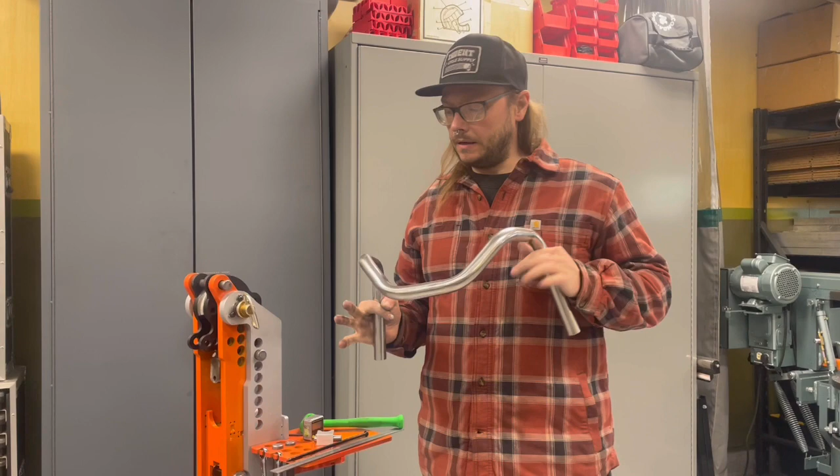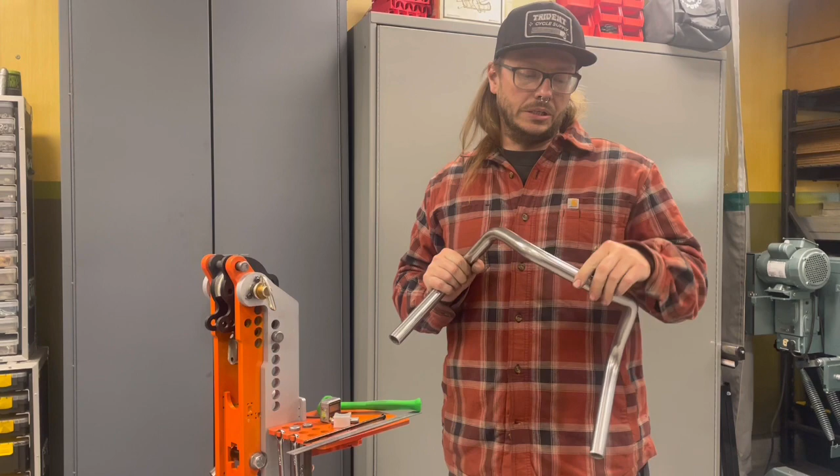All right, now I'm just gonna go over some of the features of the 1.9 CLR die, which is different than some of the other dies on the market, obviously because it's the smallest radius that I'm aware of. I'm just gonna change some things around and then we'll jump right back. This is a set of 6-bend handlebars that I bent up on this bender this morning. I used the CAD program that's included with the bender to figure out the dimensions, all the rotations, the bends, the feeds, and bent these up, and they came out pretty good.

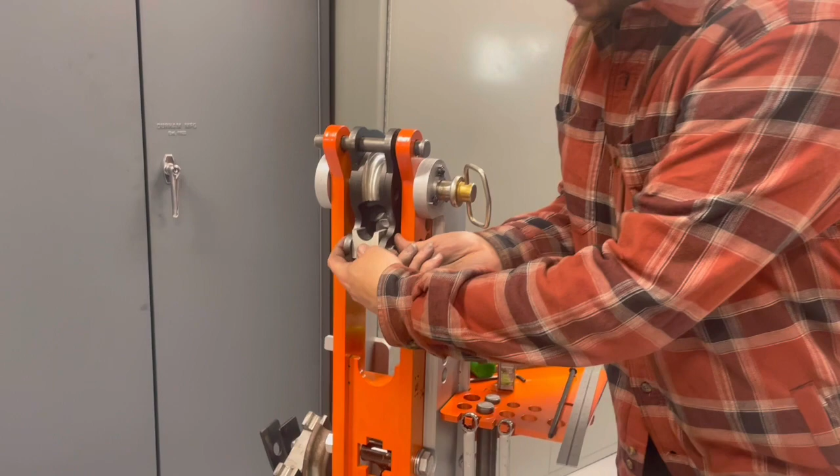I just wanted to talk to you about some of the features of this super tight radius die. One, we've got our drive pin located up out of the way. That allows for more clearance down in here when you're doing the bends. The shackle that holds the bends goes in on here. You can install the pin here. You can install the pin in here if you want to hold it really closely.

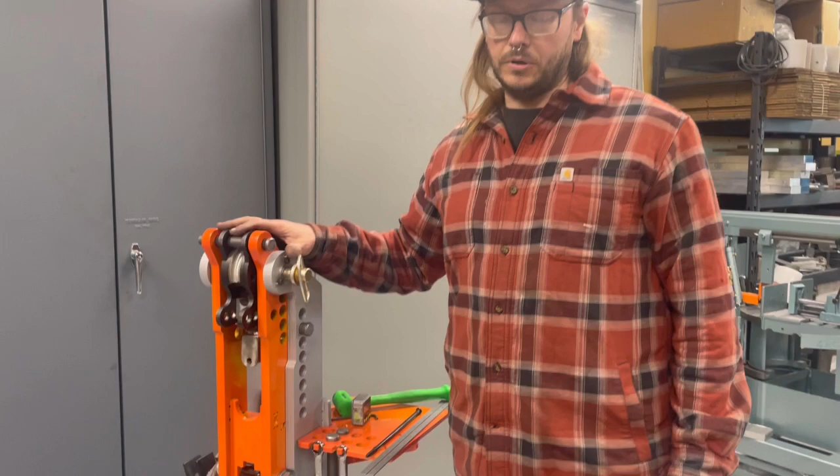And that just gives you the really tight bend-to-bend numbers that you can't get with other benders. One thing to note though with this very small radius die is you will get a little bit of necking on the inside of your bends. It's not terrible. Usually you can blend it out just by cleaning it up here and here a little bit, and you won't even notice it with the naked eye.

But numerically, we're losing around 7% on this 120 wall, 1-inch stainless steel. It is welded tube, not seamless, so that usually crushes a little bit worse. But so worst case scenario, I've lost about a 1/16 of an inch on the cross section here. But you know, it really isn't that noticeable, and like I said, you can pretty much blend it out and not notice it at all.

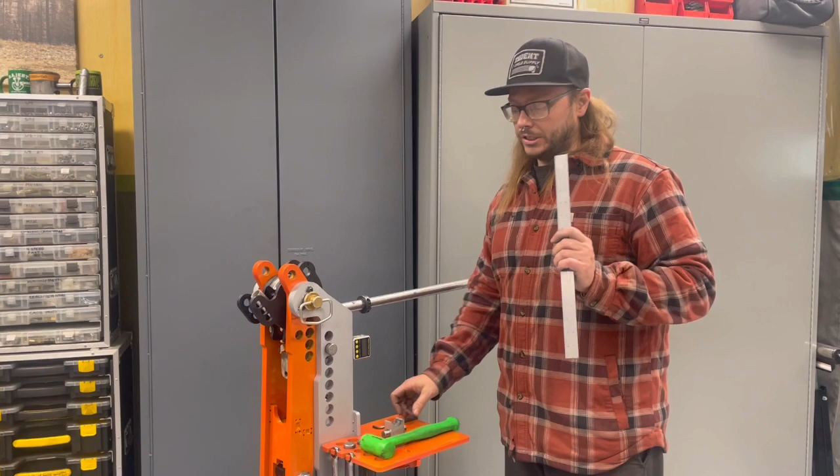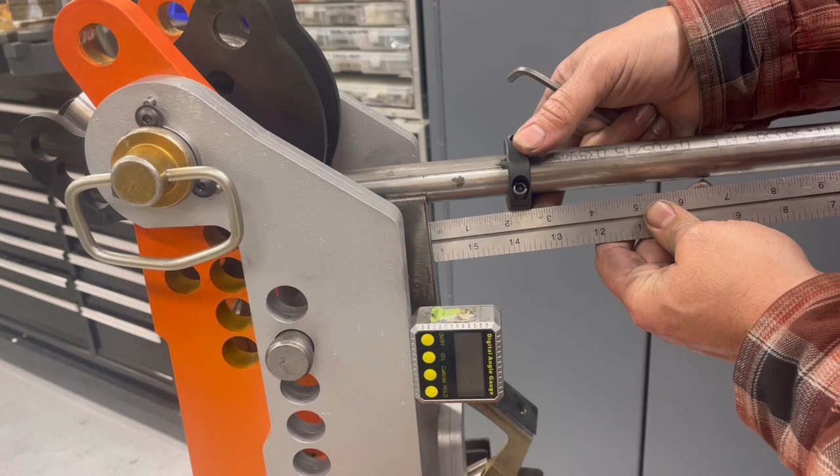Okay, I'm going to show you how the vertical bender actually works and what is really great about it. So I've already gone ahead and put an approximately 45-degree angle bend in my tube, but I haven't done anything else. So the first thing that I'm going to do is set my feed. In order to set my feed, I've got a 1-inch shaft collar, which is included, and I'm going to slide that up. The feed distance is going to be the distance between the bends. So I'm going to go for about 2 inches here, and I'm just going to tighten that down.

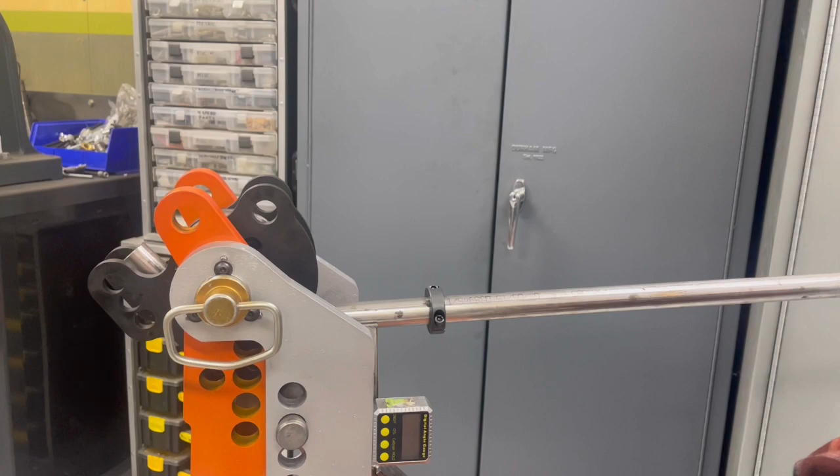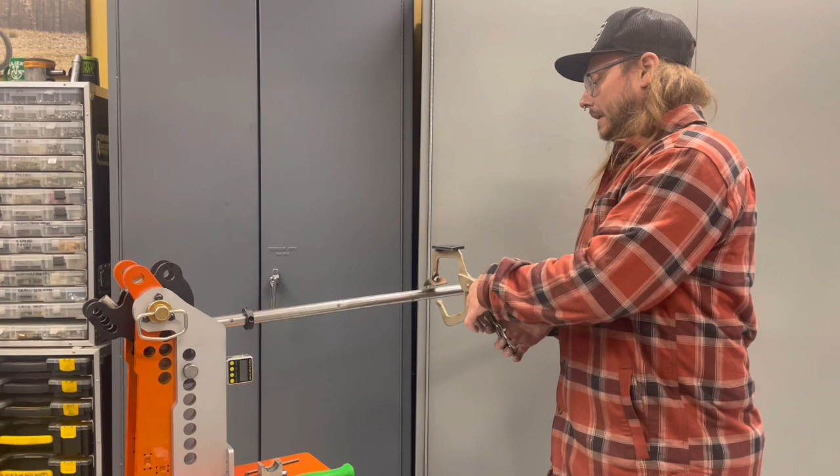All right, next, I'm going to take my handy dandy clamp. This is just a vise grip with an angle and a flat plate welded to it. And I'm going to clamp this on the tube. The orientation doesn't really matter. And I'm going to take my digital angle finder and set that on there, turn it on and zero it out. Okay, now I'm going to pull up on this to release it and push it forward. And for the time being, I'm just going to let this hang.

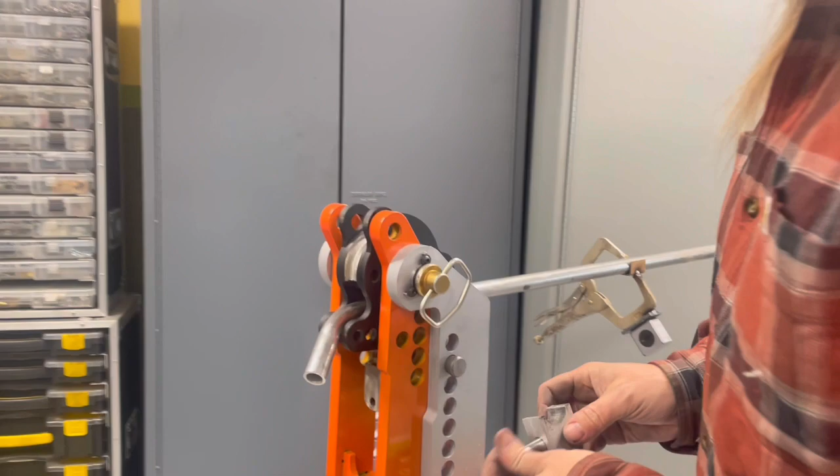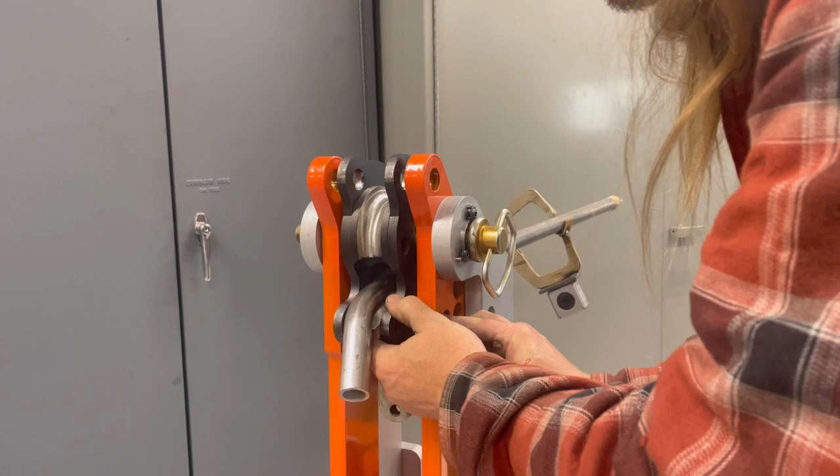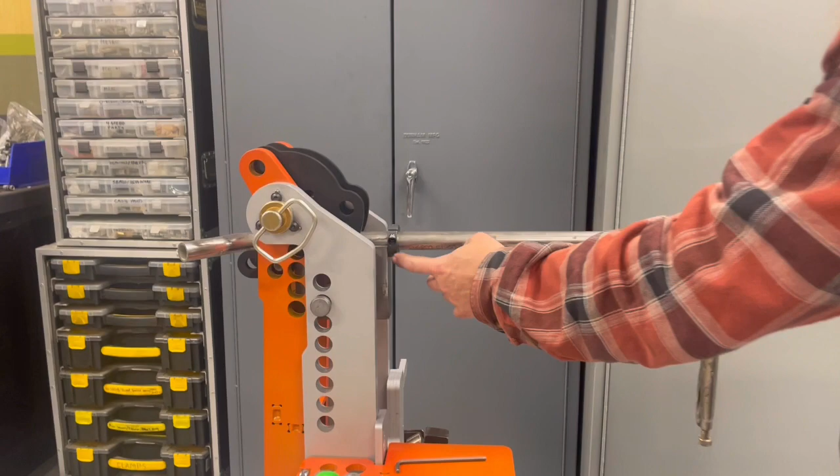And so now I'm going to reset my die. In order to reset the die, we just got to line a few things up. You put your backing plate underneath here and slide this pin through like so. Okay, now I'm going to look at my angle finder and set this to a 90-degree angle. That'll allow us to know that our bends are 90 degrees apart. It could be 180, it could be whatever you want. And note that I've slid it forward till the shaft collar bottoms out on this die block, which means that I've fed 2 inches into the machine.

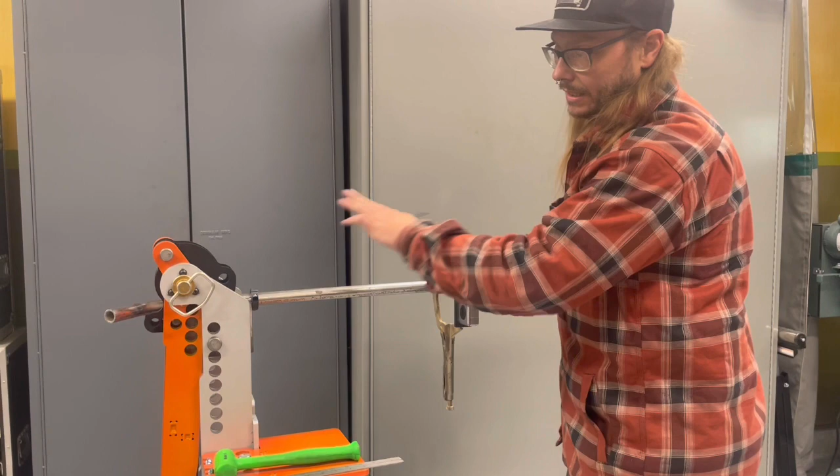So the last thing I need to do is put this pin through here, and we'll just line it up by adjusting that a little bit. And the last thing we have to do is loosen this shaft collar. Now, this whole time I've been keeping downward pressure on the back of this stock right here, and that just kind of locks everything in. So once the shaft collar is loose, I can slide that back out of the way, and then I'm going to start my bend here.

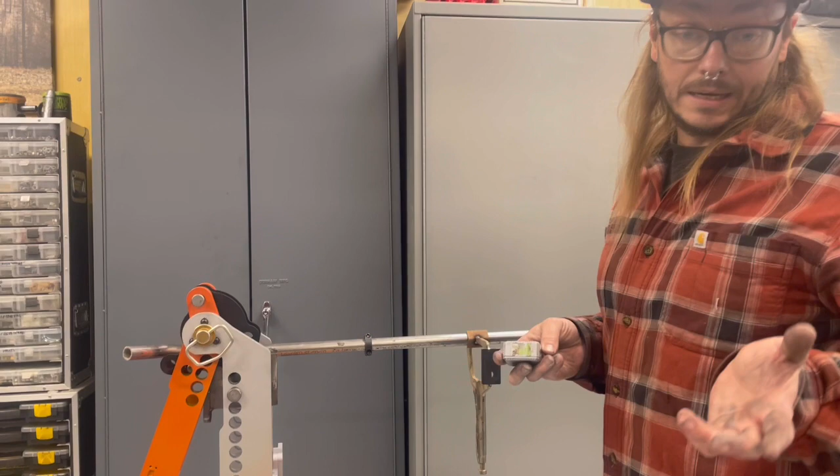And so once I've got some of the bend engaged, I'm going to take my angle finder off of here, or if you have a second one, it's really great, and I'm going to put it on here. I'm going to calibrate it, and that'll zero it out. And then I can indicate off of the bottom of this tube right here. It's going to be hard to see on camera, but I can see it. And now I'm going to be able to read my angle that I'm bending.

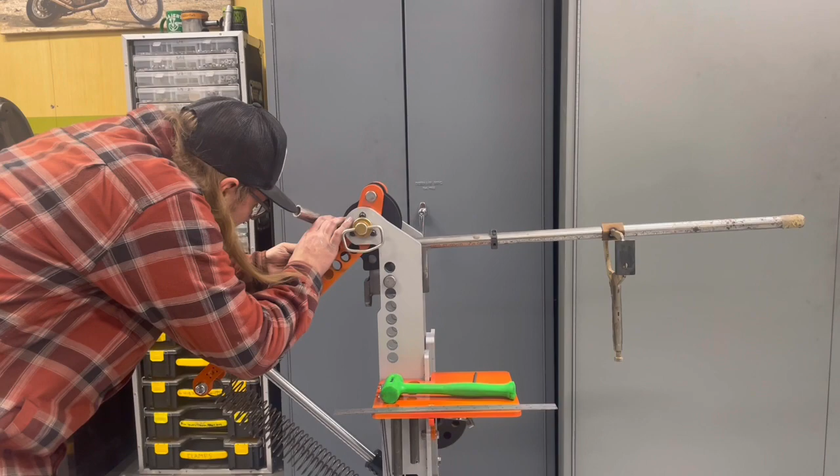So let's say that we're going for a 30-degree angle.

Sorry about the air compressor kicking on, but there's nothing we can do about it.

We're going to go for a 30-degree angle here. Just from my experience, I know that 30 degrees will get around 2 degrees of spring back. And so I bent it to about 32 degrees here. And so what I'm going to do is release. Once this pin is loose, I know that there's no tension on this system. So I can come over here and just to check, I'm going to zero my calibration out, put this back on here, and we are almost perfectly at 30 degrees.

So now we've made one bend in relation to another bend. We know the difference in the angle clock between them, and you would just go on and continue to bend and bend and bend however you want to bend it. And you can do that based on the CAD programs that I provide or your own design.

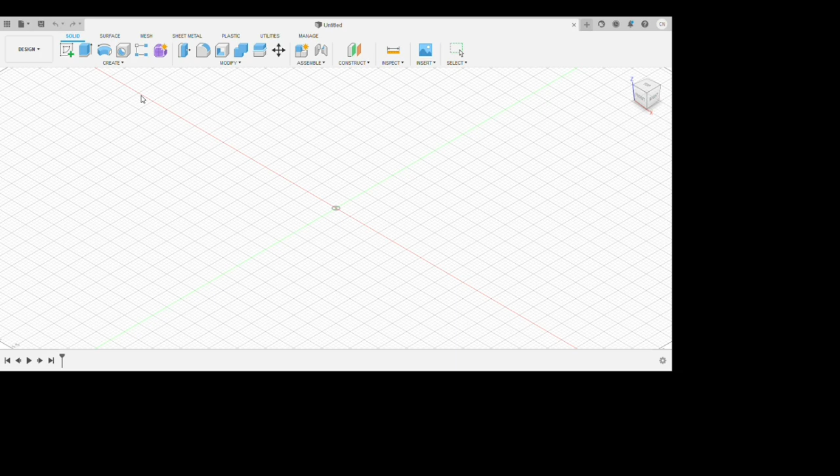So the first thing you're going to do is open one of the handlebar files. You'll click open from my computer and then browse to the file on the flash drive. You'll probably want to make a copy of this just in case you screw something up. You'll still have the original. So I'm going to click on the 4 bend bars and open those up, and it just defaults to a pretty standard shape here.

And what we're going to do is, in order to make what you want to make, we're going to come in here and click modify, come down to change parameters, and that's going to open up this dialog box. And we're going to come down here into the user parameters, and we can start editing things. So let's say that you want to use 7/8 material. And the center length is the length of this section where your risers would clamp. So we'll just choose 5 inches for the time being.

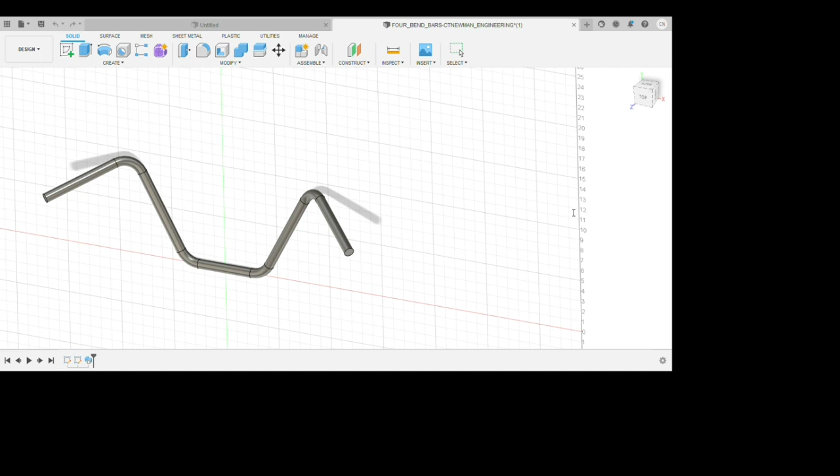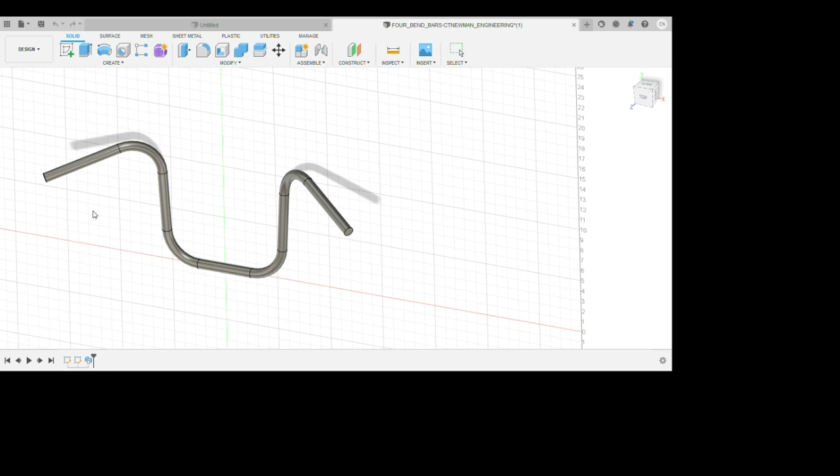The centerline radius, let's say you've got a 3-inch centerline radius die. And bar height, let's make them 12 inches tall. And we'll make the bar width 33. The grip length is the length of the section where your grips and brake levers would go. So we can make that 7, 7.5, 8 is usually pretty good. We'll do 7.5 in the interest of changing something.

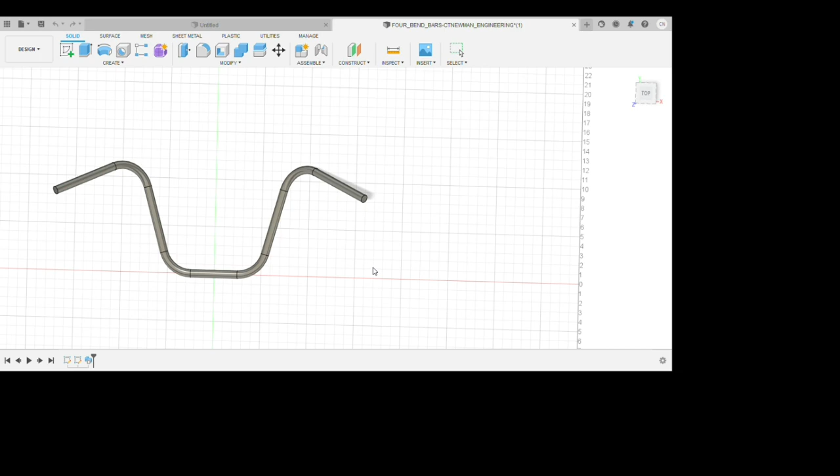The grip drop is basically, when viewed from this angle, how much the end drops here, and so 2 inches is good. That looks good, but let's just go with 2.5 again for the sake of changing something. And then the pullback is basically how far from this point to the center line, which is 6 inches. Let's make it 4. Okay, the last user parameter here is not meant to be edited, and what that's doing is it's outputting the total length of material you'll need. So for these bars, you'd need 51.5 inches or so.

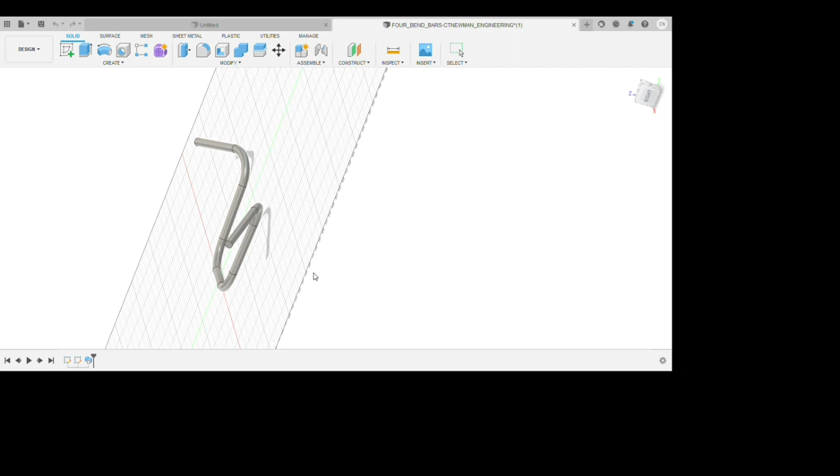It's always a good idea to bend your bars from the longest stick possible, because if you, for instance, mess up your second bend, you can cut it off right there and you don't waste an entire cut to length piece of material. But it's good to know at least how much you'll require. So once you've got your design here, what the computer program does is it basically spits out all of the values that you need in order to use the bender.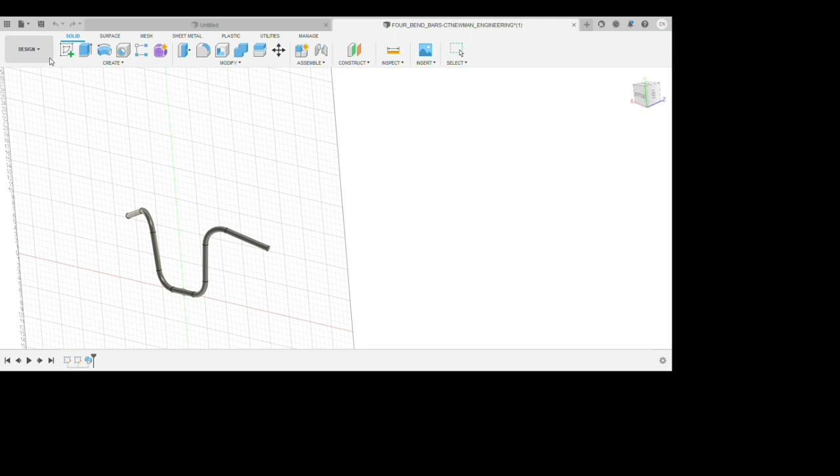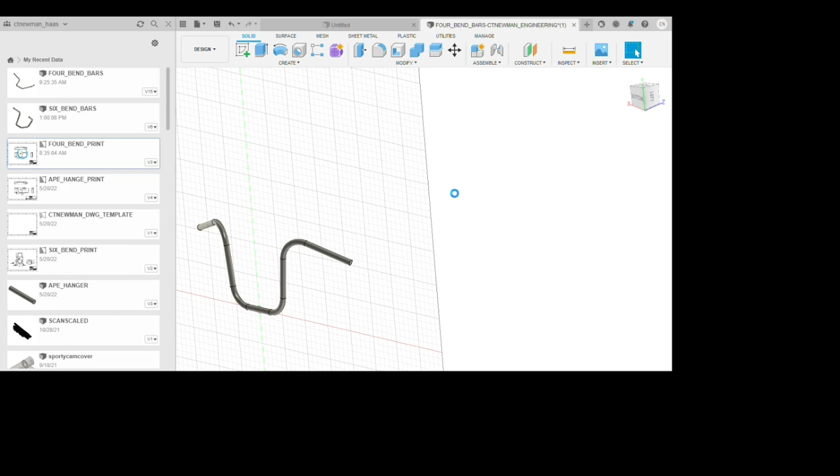Hopefully that's not too complicated. It's actually pretty straightforward. You can also, let me see here. There will also be a print that comes. I was hoping to be able to have it update a scale print, but unfortunately that doesn't work. So it'll just be a static print, but it will have all of the required information once this loads. Basically saying where your feeds are, where your bends are, and the order that you do this.

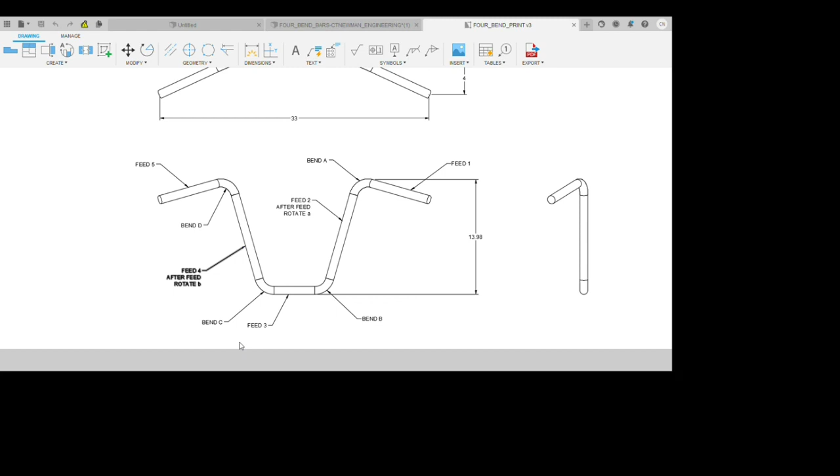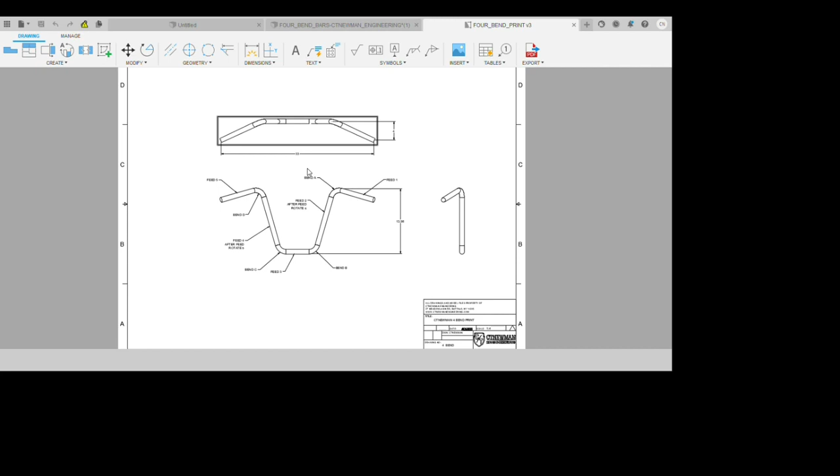So you would feed, bend, rotate, bend, rotate, bend, and then your final feed really isn't a feed. So that's how you use the software. The 6 bends are similar, a little bit different configuration parameters, but hopefully you guys will be able to use this and get some value from it. It works very well, and I've been using something like this to build every set of handlebars that I've ever made.